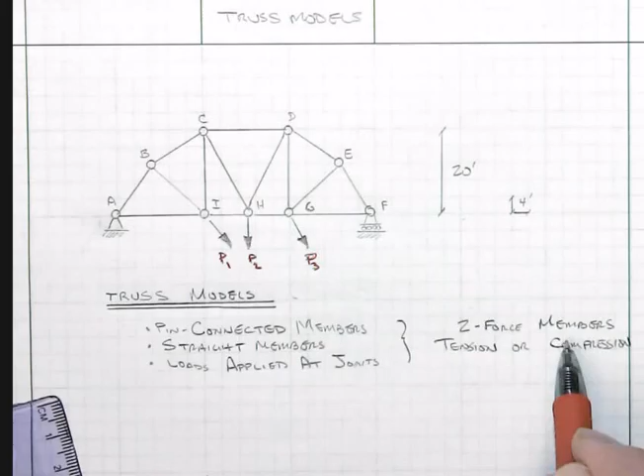The members are straight, loads are applied only at the joints, and the implication is that we have two force members. Because they're straight, they are either pure tension or compression. So let's challenge that conclusion and, in a sense, really derive where the conclusion is going to come from.

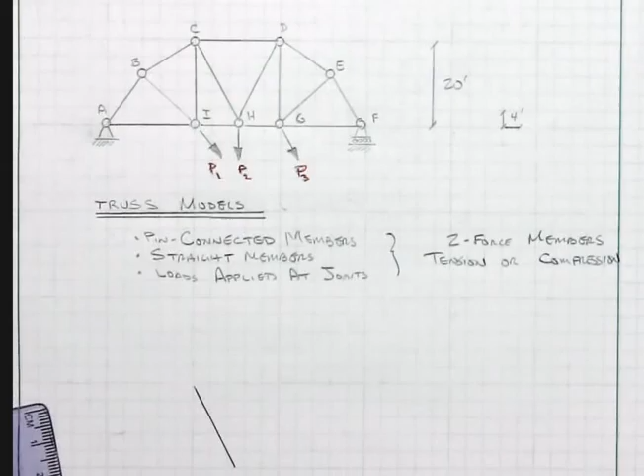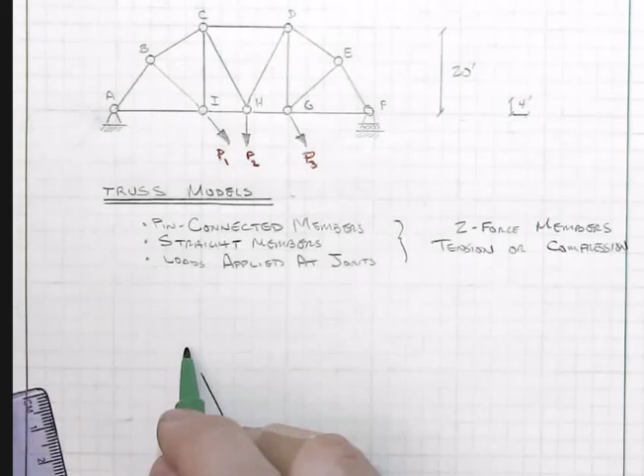We're going to go to this member CH and pull it out. Why that one? Because it's one of the more complicated arrangements in the structure, connected to the most things, and has applied loads at the joints as well. We're going to see what we get out of taking a close look at that particular one.

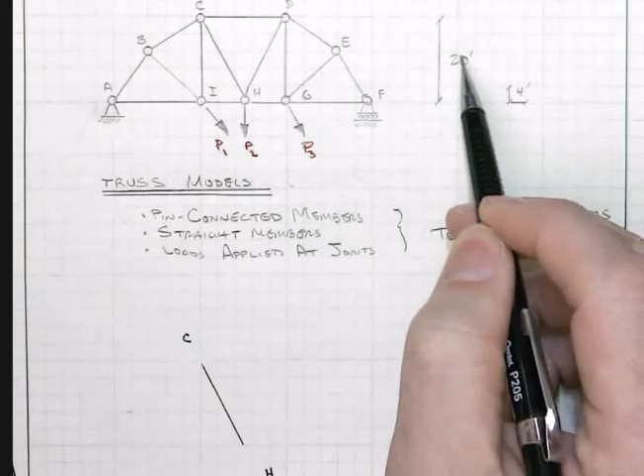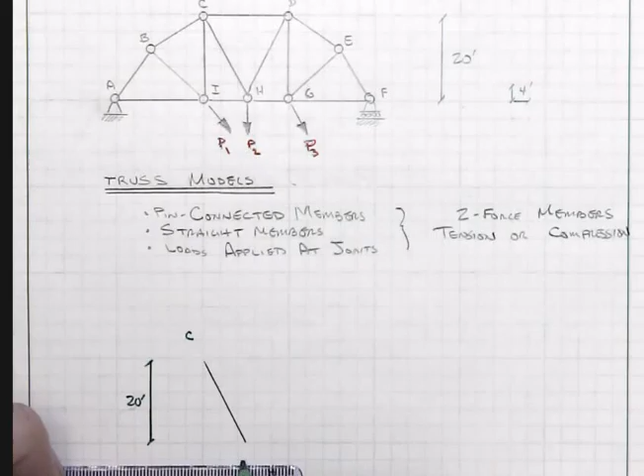Now notice, for the purpose of this model, that we've got 20-foot total height and 4 foot on the little grid scale. So that really means that what we have here is a 1-to-2 type triangle, where we have 20 foot there and 10 foot on horizontal. Right? So now let's not make any assumptions here.

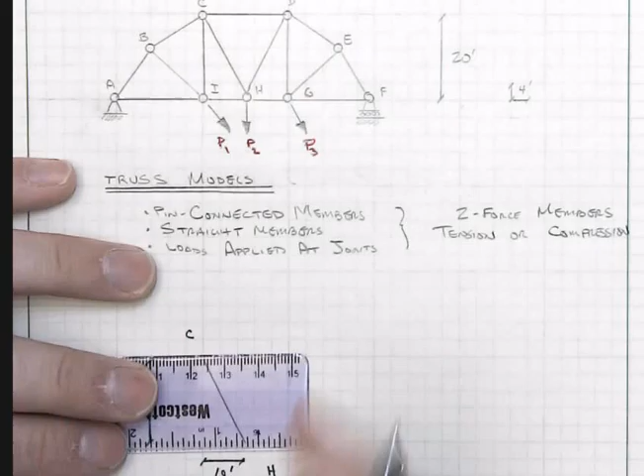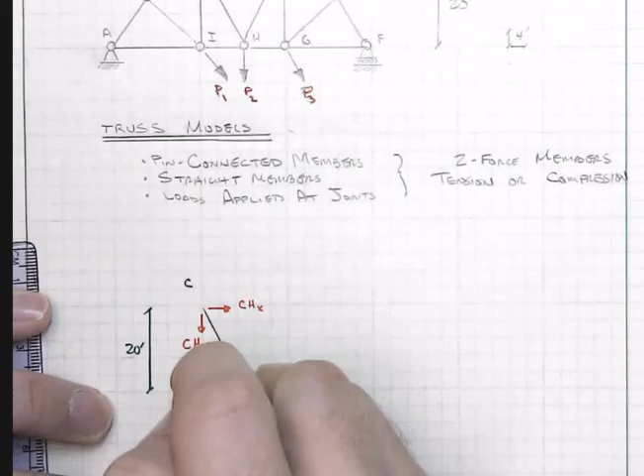If we pull a pin, a model would tell us that when we pull the pin in 2D, we're going to end up with two different orthogonal components. We'll call this CHX at the top and CHY at the bottom. You'll see in just a second why it is that I have put these in those two particular directions. And then down at the other end, there's no other forces applied along the member.

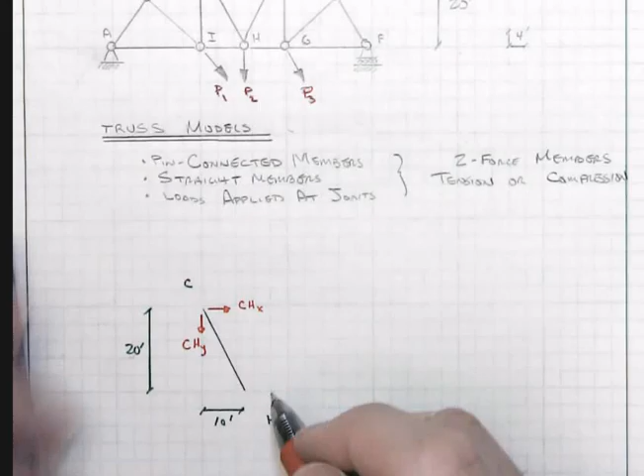We're ignoring the self-weight of the member as insignificant compared to all the other effects. And if that's appropriate, then it becomes obvious that for horizontal equilibrium, the force at the other end, HCX, has to be equal and opposite CHX. And then likewise, the verticals have to be equal and opposite. That only tells us about the relative natures—it tells us about what has to be true at either end.

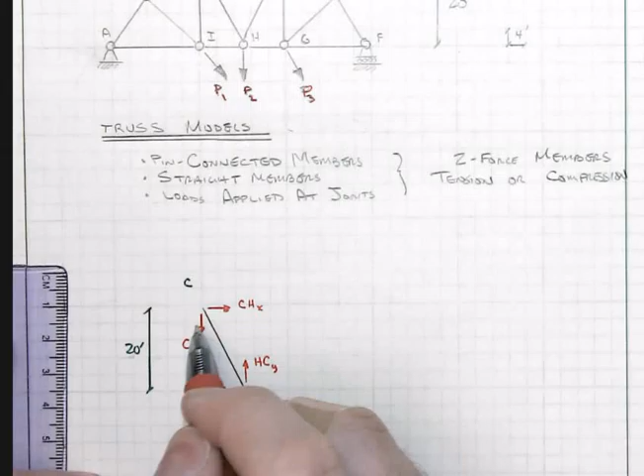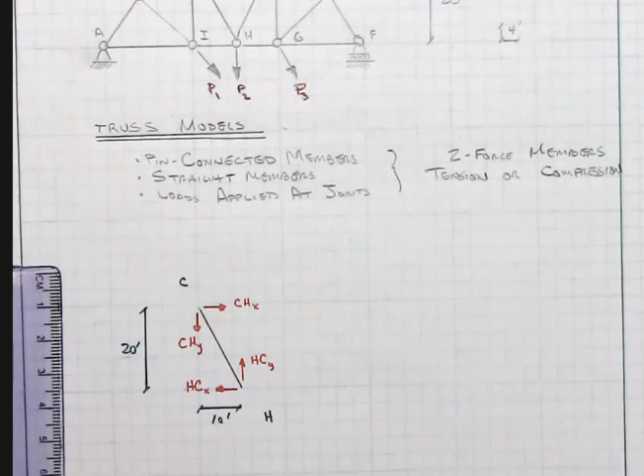We're going to just use then our third equation of equilibrium, such as, let's sum moments about point H and see what we get. Let's take clockwise as positive. We'll have CHX times its moment arm of 20 feet—it's going in the clockwise fashion, so therefore positive. And then we've got CHY with its moment arm of 10, nothing else, so that has to be equal to 0. So therefore, CHX is equal to 10 over 20 times CHY.

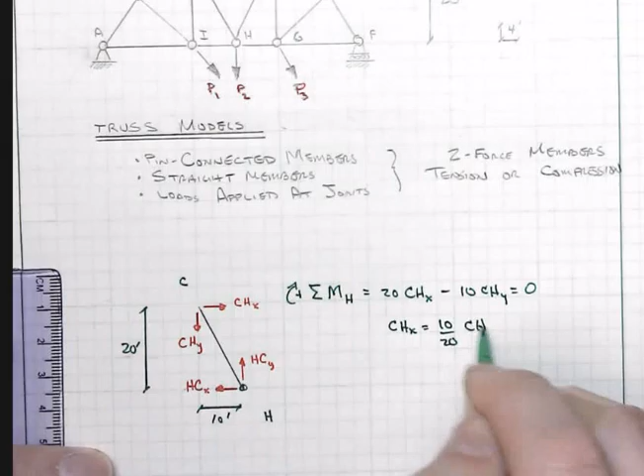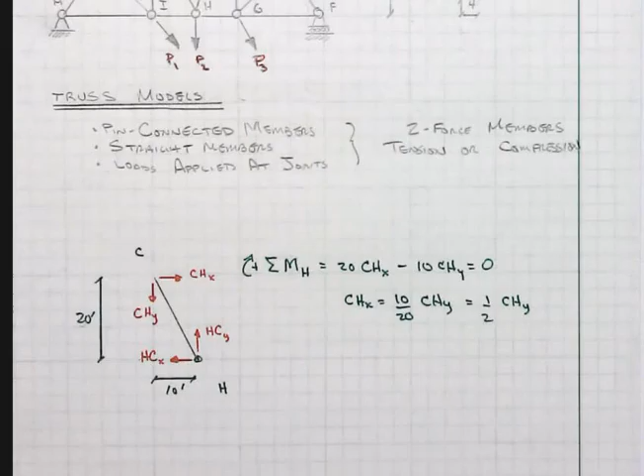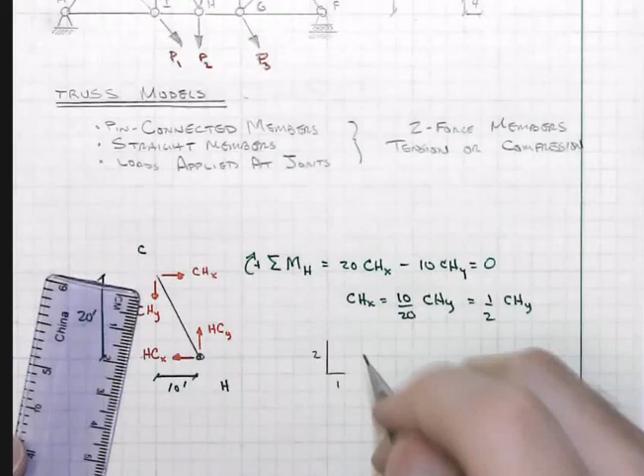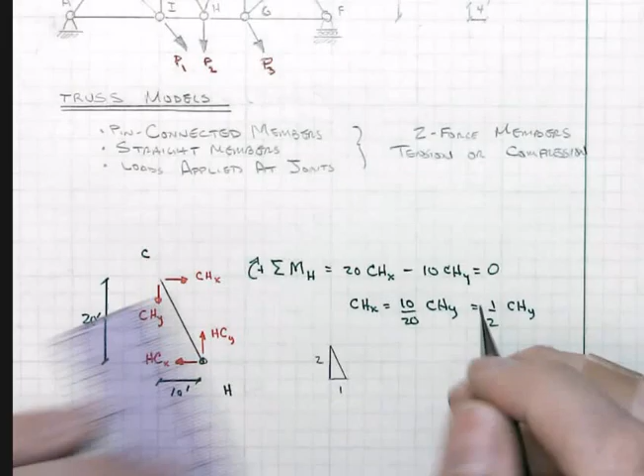That's a crucial and important relationship, 10 to 20, or you could write that as 1 to 2. I say that's crucial because note what has to be the case about the resultant of those two: that triangle would form a 1 horizontal to 2 vertical, right? That's what we're told here—that the y is twice as big as the x. That happens to be in the same proportionality as the geometric layout of that triangle, 10 to 20—10 on the horizontal, 20 there. And it had to be that way. That's exactly what this equation told us, and it's a direct consequence of members' loads applied on the joints.

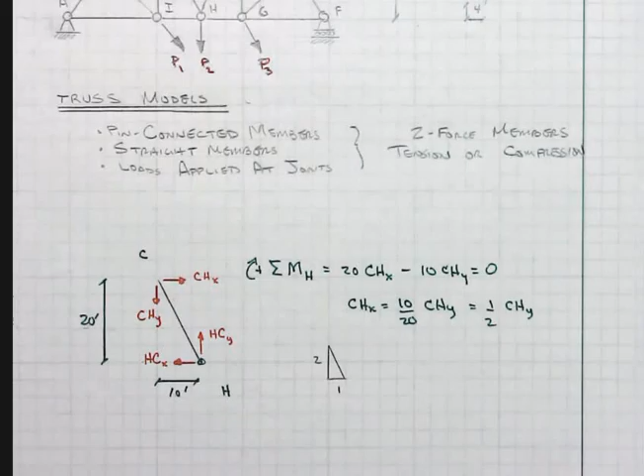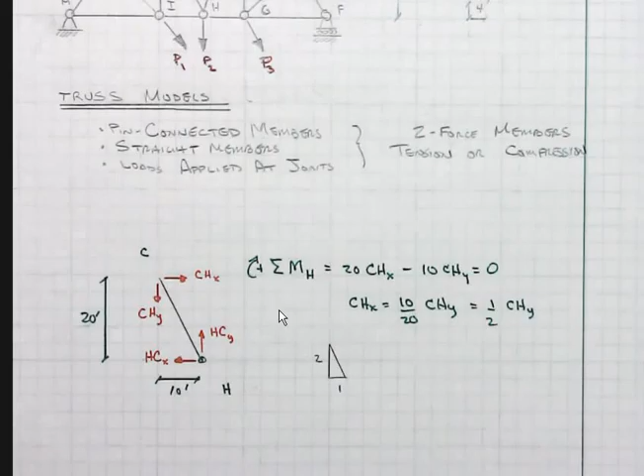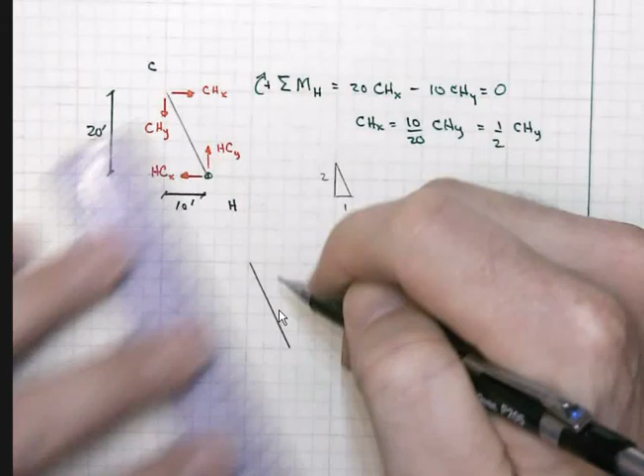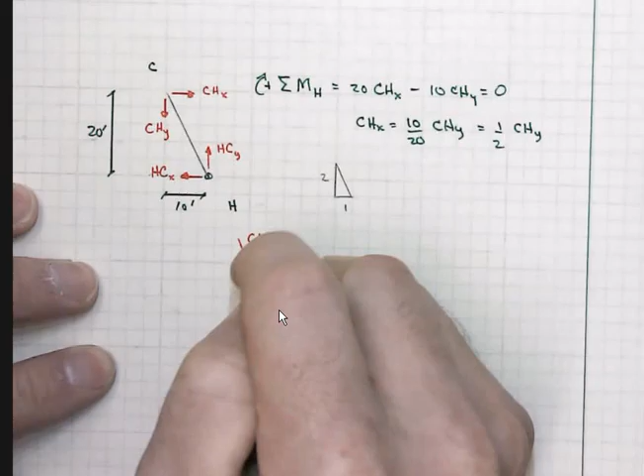That was a crucial aspect of that. It tells us then that ultimately, when we go look at the net resultant effect on that member up there at joint C end, that will have a resultant CH that has to be directed along this line, straight between those two members. And for equilibrium standpoint, HC at the other end has to be equal and opposite, so that we end up with, in this case, pure compression, as shown here, at least symbolically.

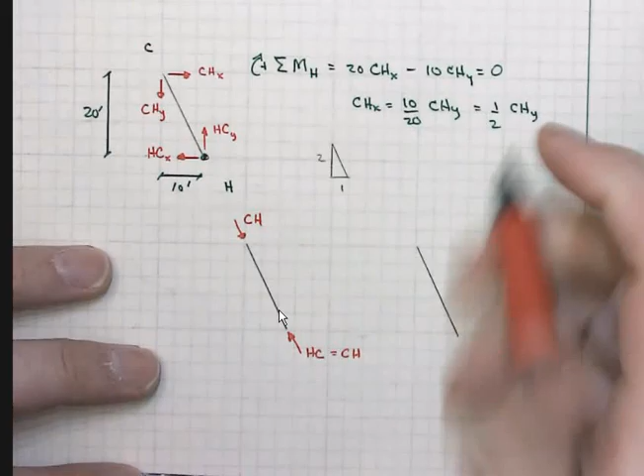Or, of course, this could have been turned around the other way. I made an arbitrary decision about what direction these two were going. Notice that in order to have equilibrium about point H, CHX had to go in one direction, CHY had to go in the other direction. That's why I laid those out the way that we did. We could have done that development work in the other direction, and we would have the same result—it's just that we would have ended up with net tension instead of net compression.

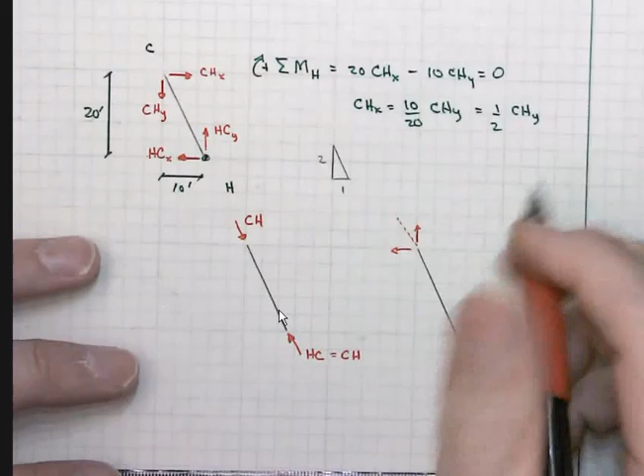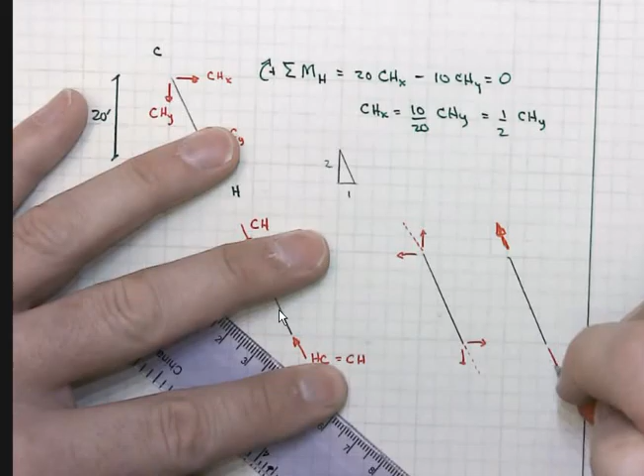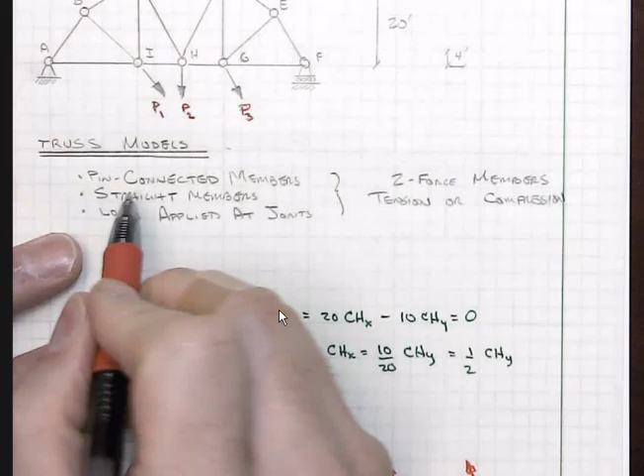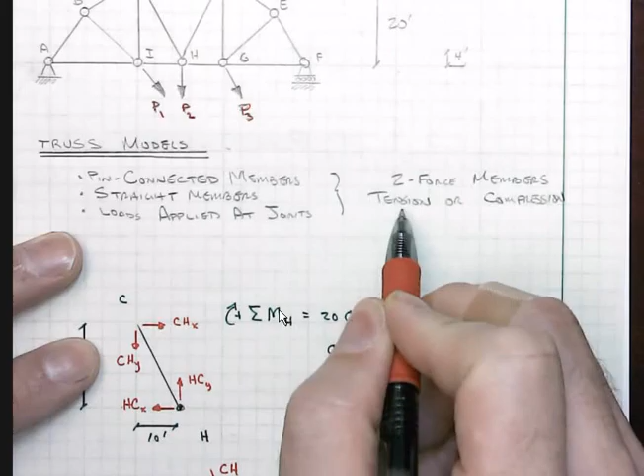And for the actual loading situation in the truss that we have, that might turn out, we think, to be far more likely the case. Okay, so that's a proof of why it is that if we end up with pin-connected members, straight members, loads applied only to the joints, we have two-force members—where that really means we only have one unknown, because if we know one, we know the other end—and that we end up with either pure tension or compression. As they say in the math world, QED. Thus it has been proved.